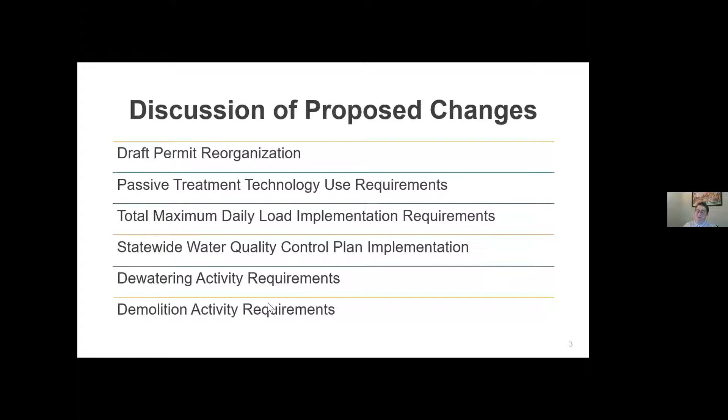So some of these changes are listed here, and they are the primary topics that I'll be covering in this workshop. We've reorganized the draft permit, hopefully for easier use. We've added passive treatment technology requirements. We've incorporated total maximum daily load implementation. We have updated some information to be in compliance with the statewide water quality control plans. We've added requirements for dewatering and demolition. And then notice of non-applicability criteria, notice of termination process, sufficiently sensitive test methods, monitoring and reporting revisions. We've also removed the bioassessment monitoring program and the rain event action plans, which I'll get into in a little bit more detail.

So for the permit reorganization, for those of you who are used to the 2009 CGP, you may have noticed a difference in the draft if you've looked at it, that the organization of the permit requirements is different. Throughout the implementation cycle of the current permit, we've heard feedback that it's difficult to navigate in the permit. So we've done some reorganization in an attempt to address this. In the order, we started off with the findings, defining which projects need coverage, applying, revising, terminating permit coverage, and then the requirements that apply to all dischargers.

Attachment A is for the linear underground and overhead projects. It had a lot of the same content that the order had, so we consolidated it. We also organized attachments A, C, D, and E, which are the risk requirement attachments, so that it flows through minimum BMPs, monitoring, and then reporting. Compared to the 2009 permit, there are 4 new attachments, including passive treatment requirements, total maximum daily load implementation, ocean plan exceptions, and dewatering.

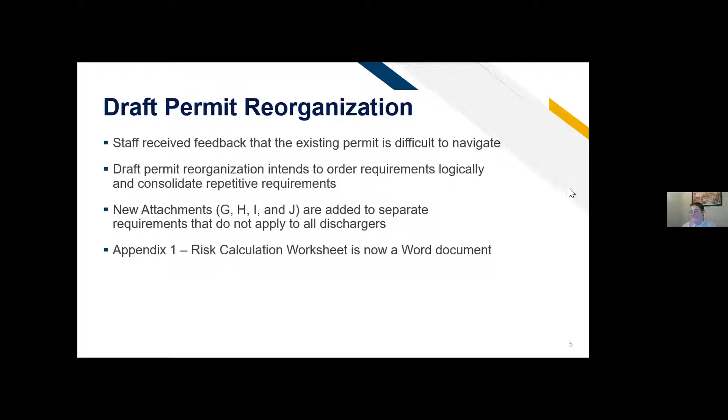So that being said, I'd like to talk about the passive treatment technology use requirements. It's kind of a big change in the draft permit, and kind of important.

Treatment chemicals which cause the coagulation and flocculation of suspended solids are often used to meet the turbidity numeric action levels in the stormwater permits. We've seen this over the years—you're looking to meet that 250 NTU, and so frequently folks will use some kind of chemical treatment.

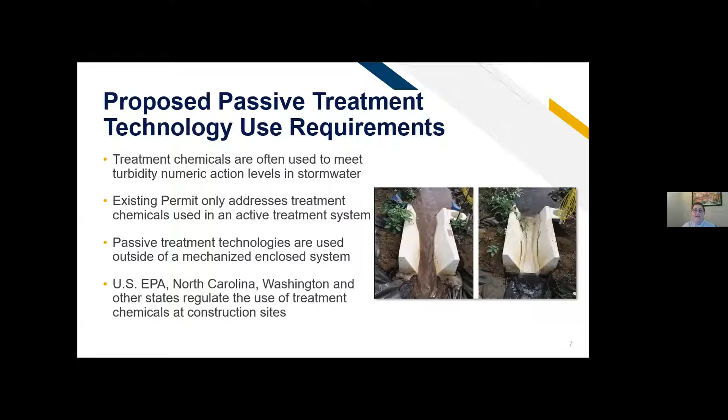The 2009 CGP only addresses treatment chemicals used within an active treatment system, which is an enclosed system that can be monitored for toxicity prior to discharging the effluent. Passive treatment technologies differ from active treatment as they are applied outside of an enclosed, mechanized system with pumps, filters, and real-time controls. Regulatory requirements for passive treatment technologies are currently implemented in the US EPA, North Carolina, and Washington's construction stormwater permits, and so we looked at those to see how we might address these issues.

The passive treatment technology requirements found in Attachment G of the draft permit specifically apply to products or chemicals that are applied to water, such as sedimentation basins or within a concentrated runoff stream. Stakeholders worked with State Water Board staff to develop the proposed requirements, and the intent is to prevent construction stormwater discharges from creating potentially toxic conditions in waterways by specifying which chemicals can and can't be used, design and application methods, monitoring, and reporting.

We had a preliminary staff draft of the permit that went out a while ago, prior to this public comment period. That draft sought to impose requirements for passive treatment chemicals mixed into bonded fiber matrices, hydromulches, and spray tackifiers. But based on feedback from interested parties, staff determined it would be appropriate to remove those requirements from Attachment G—that's a change we've made from that first draft.

Passive treatment chemicals can vary in active ingredients, dose amounts, application methods, and aquatic toxicities. They can take the form of liquids, powders, socks, and blocks, among many other applications. Dischargers should be familiar with the chemicals' characteristics by reviewing safety data sheets, toxicity information, and manufacturer's instructions.

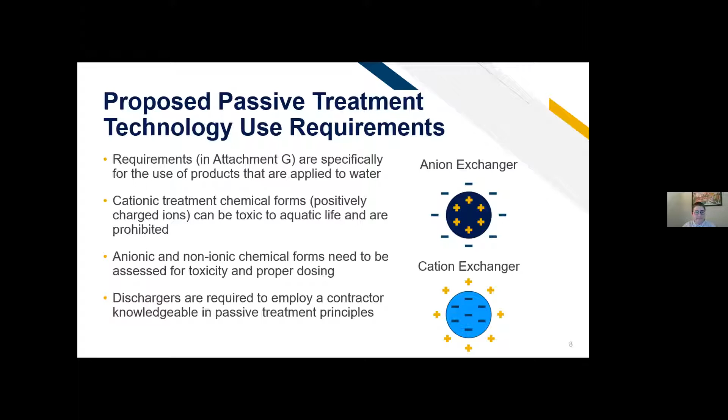So now the next big topic here is total maximum daily loads. We'll talk a little bit about this, and in the question and answer, I'm sure we'll talk about it a lot more.

So, sorry, let me find my slide here.

The total maximum daily loads are existing documents that have been adopted into regional water board basin plans by each regional water board. And they're plans to address Clean Water Act 303(d) listed impaired water bodies. TMDLs are adopted by the regional board or the US EPA, depending. A total maximum daily load is the sum of allowable loads of a single pollutant from all contributing point sources, non-point sources, background sources, and a margin of safety.

So total maximum daily loads are not self-implementing, and they must be implemented through requirements in permits or other board actions. The existing 2009 permit already includes a list of potentially applicable TMDLs, but it's outdated and does not have implementation requirements at all. The proposed draft CGP intends to update the list with existing TMDLs applicable to construction stormwater discharges.

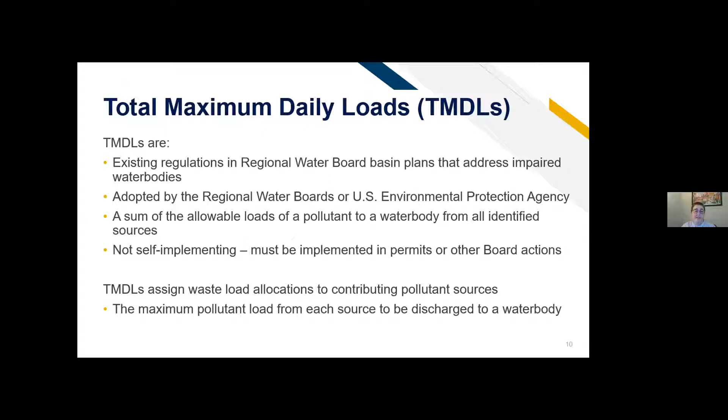So there are 69 total maximum daily loads proposed for implementation in this permit, which represent a variety of pollutant categories, including indicator bacteria, chloride and salts, diazinon, nutrients such as nitrogen and phosphorus, sediment, temperature, metals, and other pollutants that are toxic to aquatic life. Many of these pollutants are associated with sediment, which is commonly discharged, as you know, by construction projects as a result of land disturbing activities.

So responsible dischargers in this context are dischargers with coverage under the construction general permit who discharge stormwater associated with construction activities and authorized non-stormwater discharges either directly or through a municipal separate storm sewer system to impaired water bodies or watersheds identified in a TMDL with a waste load allocation assigned to construction stormwater sources and have identified one or more TMDL specific pollutants in the site's construction stormwater discharge.

That is the world's largest sentence, and it may not make total sense, but that's why we have a Q&A. And I'll continue to further explain this a little bit more. It's definitely the most complicated piece of this permit.

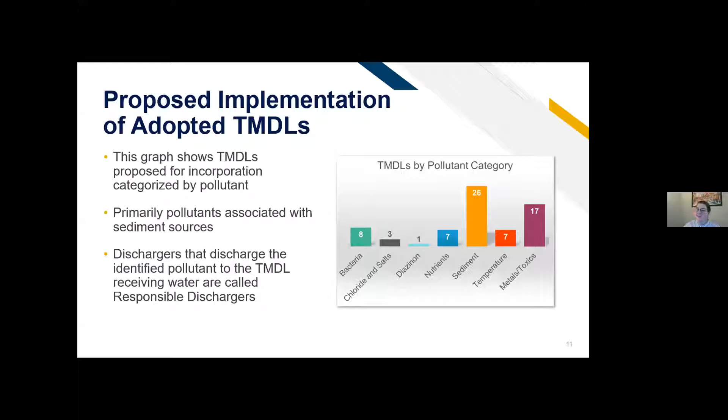So due to the variety of pollutants and waste load allocations assigned to address them, staff developed multiple implementation strategies consistent with the assumptions and requirements of the TMDL. The intent was to streamline compliance by leveraging and modifying existing permit requirements wherever we could, and existing requirements such as pollutant source assessments, source control best management practices, soil loss modeling, such as RUSLE2, non-visible pollutant monitoring, and reporting are the basis for the TMDL implementation requirements in this permit.

So we are proposing 4 categories of TMDL implementation requirements. The first being compliance with the general permit, where those are already sufficient to comply with the TMDL. All 4 of the categories must technically comply with general permit requirements, but that's all they have to do. The second category here is compliance with erosion and sediment controls paired with RUSLE2 soil loss modeling to demonstrate compliance with mass-based waste load allocations, which are typically assigned for sediment and pollutants associated with sediment.

The third one is compliance with the TMDL related numeric action levels, which are new action levels to comply with concentration-based waste load allocations assigned in the receiving water. And those action levels will act just like the turbidity and pH action levels, where if you exceed, you have to do some kind of iterative corrective action and make sure that your BMPs are working, et cetera. And then the fourth is compliance with the TMDL related numeric effluent limitation to comply with concentration-based waste load allocations assigned at the point of discharge.

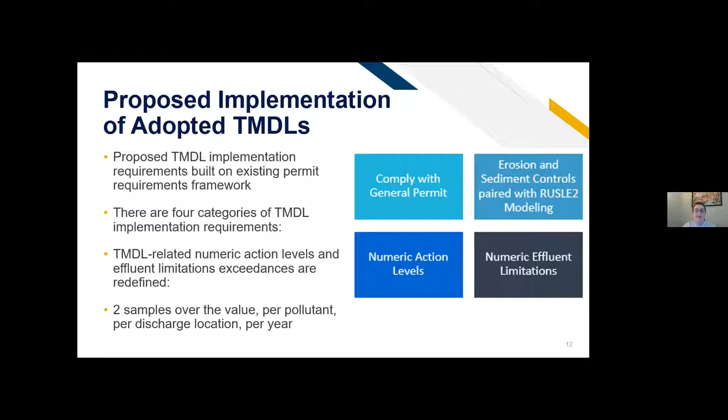One of the biggest changes from the May 2021 draft, which is the draft we're operating under now, is that staff has redefined what it means to exceed a TMDL related numeric action level or effluent limitation. Instead of a single sample limit, we define an exceedance as being 2 or more analytical results per pollutant per discharge location over the value that is listed in table H2 for the specific pollutant water body combination in a reporting year. This was based off similar implementation requirements in the industrial stormwater general permit, which went into effect in 2020. So it's kind of a new way to do things, and one that we felt would be appropriate.

So the 68 TMDLs assign a total of 204 waste load allocations. These are all just numbers that will be important, but not so important. But 14% of these TMDLs are proposed to be addressed by complying with the general permit requirements, 8 of which intend to address bacteria by emphasizing minimum BMPs. The one unique implementation requirement is for the Los Peñasquitos Lagoon sediment TMDL, which does require that dischargers submit an estimate of discharges representative flow rate on an annual basis. So for that one specifically, the TMDL itself had requirements to measure flow.

45% of the TMDLs are proposed to be addressed using erosion and sediment control paired with RUSLE2 modeling, and 41% of the TMDLs are proposed to be addressed with numeric action levels and numeric effluent limitations, 23% numeric action levels and 18% numeric effluent limits.

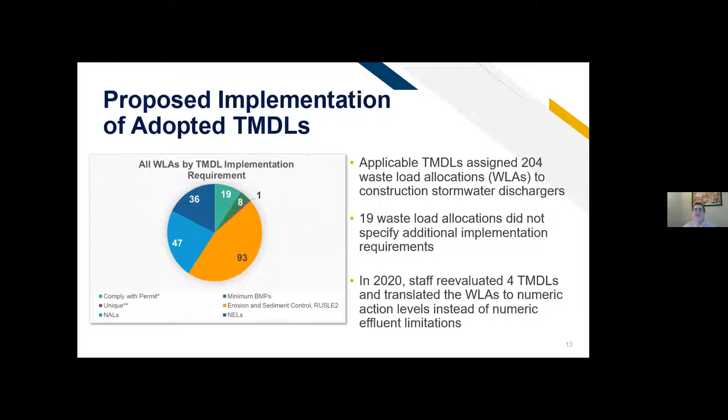Step 2 is to perform a site-specific pollutant source assessment. Does the site have sources of the TMDL listed? Of those pollutants, is there potential for those pollutants to be present in stormwater? If not, then the TMDL implementation requirements are not applicable. And then step 3 is to refer to the proposed attachment H for applicable TMDL implementation requirements to determine what requirements are applicable to that site.

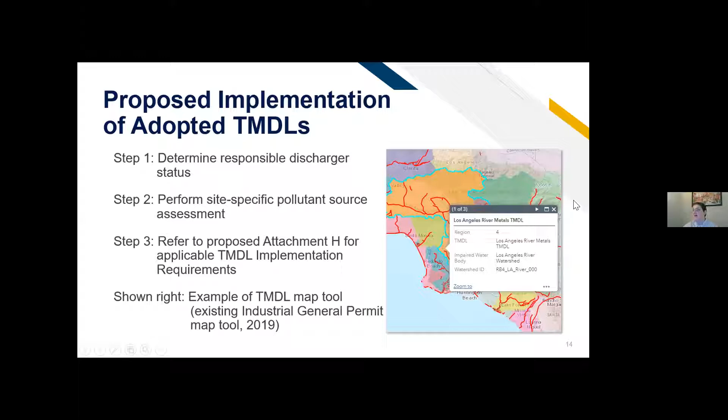And I'm sure we'll have lots of comments and questions on TMDL, but this is the presentation. You can look at this for reference as well. And then briefly, before we get into Q&A, I wanted to talk about some other proposed permit changes.

Since the 2009 CGP has been in effect, we have adopted statewide water quality control plans for ocean waters, as well as inland surface waters, enclosed bays, and estuaries. These water quality control plans function similarly to those adopted by the regional boards, but apply to the whole state. Likewise, the regulations, policies, and water quality standards established by the water quality control plans are implemented through other state water board orders, such as the CGP, the IGP, and other permits and orders.

Additionally, the ocean plan was updated in 2019 and requires the implementation of monitoring requirements for discharges directly to ocean waters. The monitoring requirements of the construction general permit are deemed compliant with the model monitoring provisions in the ocean plan. So there's information about that in the permit. Additionally, the ocean plan prohibits the discharge of stormwater associated with construction activities to areas of special biological significance, or ASBS, unless the discharger is granted an exception. The requirements for discharges that are granted an exception are in attachment I of the draft CGP.

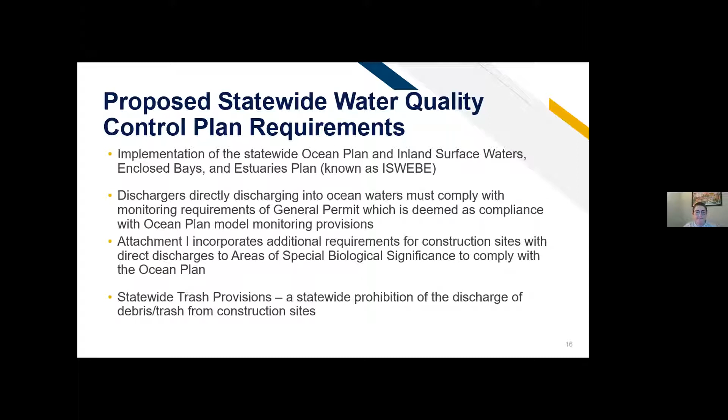All right, so dewatering. The proposed permit defines and incorporates implementation requirements for construction dewatering activities to build upon the US EPA's 2017, and now they're going to have a 2022, construction general permit. However, dischargers subject to a separate NPDES, de minimis, or low threat discharge permit for their dewatering activities are required to obtain coverage and comply with the requirements of that separate permit rather than the CGP. So the requirements in attachment J of this draft permit are for projects with dewatering activities that are not already regulated. And I wanted to make that clear because I think there were a lot of questions about that.

Dewatering discharges authorized by the proposed draft permit include mechanical pumping or siphoning of non-potable water from excavations, trenches, foundations, vaults, groundwater removal, specifically related to the construction activities, and or water collected in surface impoundments, ponds, puddles, low points, and other similar accumulation points. The discharger would be required to comply with specific dewatering discharge prohibitions, and the regional water boards may request monitoring and other BMPs associated with it.

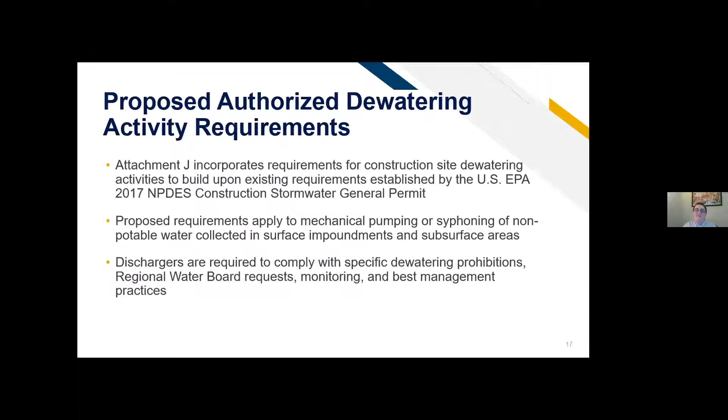The preliminary staff draft, so the one prior to this that we released for feedback, had language that restricted what methods could be used to dewater without a justification. And so we sought to address this by focusing the requirements on protecting water quality rather than a prescriptive design of the dewatering.

So demolition. The proposed permit incorporates additional implementation requirements for demolition activities to reduce the runoff of legacy pollutants such as asbestos, lead paint, and PCBs or polychlorinated biphenyls. The basis of these requirements was the US EPA 2017 CGP. And something to note is that this applies to projects that require coverage under this general permit, so those that disturb 1 or more acre of land or are part of a common plan of development. If the demolition is occurring on a slab and the remainder of the project doesn't disturb soil, then that project would not necessarily need to comply with these requirements.

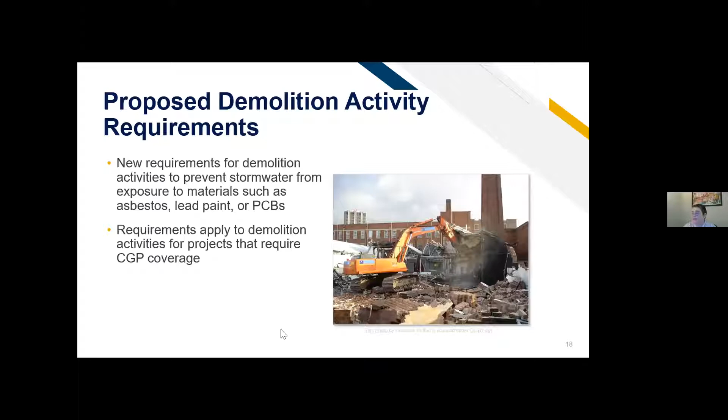And then I wanted to talk about the notice of termination a little bit. We found that notices of termination were being submitted to the regional board, and it was taking a very long time in some cases to get approval or to get someone to look at it. And so some of the changes that we've made is that we ask in the permit for the discharger to submit project-specific information, final site map, visual inspection, photo documentation, etc., so that it'll be easier from a desktop level or a short inspection for the regional boards to approve the notice of termination.

And then we've added in the automatic 30-day approval of NOTs by the water boards if they've not addressed it in any way. If they haven't gone in and said, you know, I've marked this for review, I'm going to do an inspection, or taken some other action.

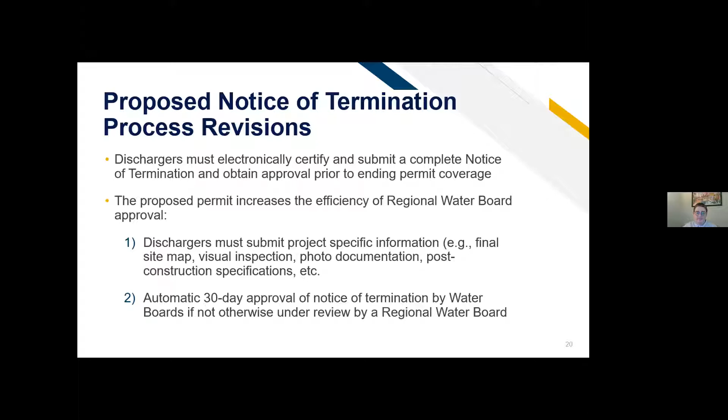And then a bit of a small one here, but it does matter. We are implementing the new federally sufficiently sensitive methods test method rule. And the US EPA has finalized minor amendments to the Clean Water Act. Excuse me. And this general permit requires the use of sufficiently sensitive methods to meet the requirements of the amended Clean Water Act, and requires dischargers to ensure all laboratory analysis are sufficiently sensitive and conducted according to test procedures under 40 Code of Federal Regulations, Part 136.

That said, these requirements apply to samples that the discharger collects and sends to a laboratory for analysis, so not field measurements. For the most part, construction stormwater dischargers perform field sampling for pH and turbidity, where properly calibrated instruments used in field sampling will comply with the sufficiently sensitive test method rule. An example where this rule may impact dischargers is through non-visible pollutant monitoring, especially when coupled with applicable TMDL implementation requirements.

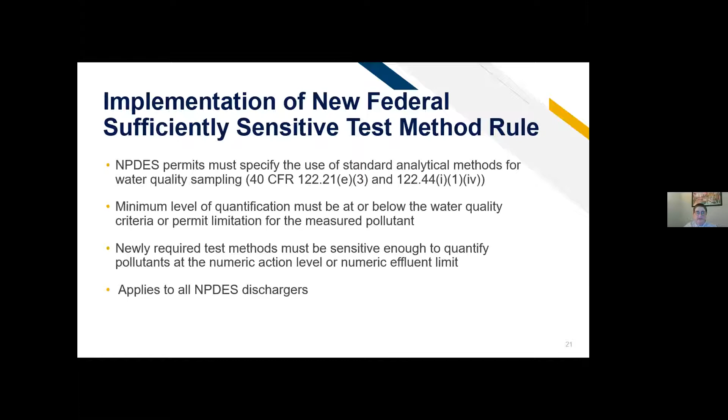My notes are a little weird here.

And we'll use the fees that are already paid into the SWAMP program to do a bioassessment monitoring study. And it would be to determine if there are significant water quality, biological integrity, and watershed health impacts from large, high-risk construction projects. So that study is no longer on the dischargers. It's something we're going to do at the state board.

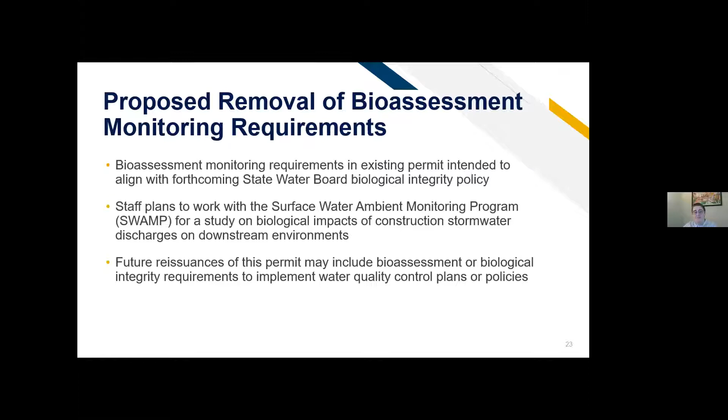The state board in the future could potentially decide to include bioassessment or biological integrity requirements to implement specific water quality control plans or policies through future permit reissuances. So this may not be the end of it. We may see it, but not this time. So we are not proposing additional receiving water monitoring requirements to replace bioassessment monitoring. And the receiving water monitoring requirements for risk level 3 and LUP type 3 sites should largely be the same, save for some clarifying revisions in the draft.

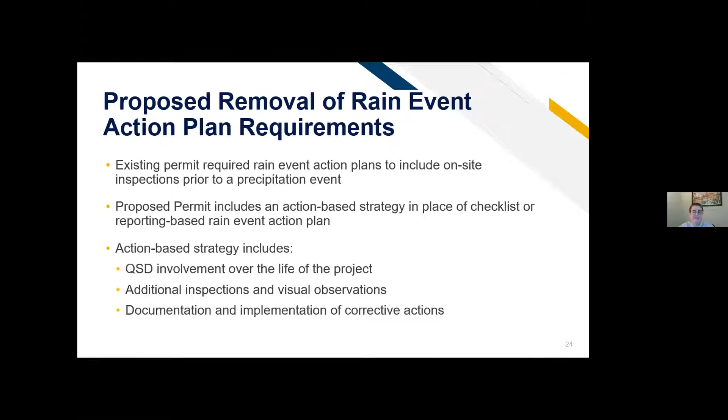And then for the REAP, the existing permit included the rain event action plan requirements to provide dischargers a consistent on-site inspection checklist for site preparation prior to a precipitation event. And staff determined that the goal of the REAP should be action-based instead of a checklist or reporting-based. So the proposed permit replaces REAPs with QSD involvement over the life of the project, QSP pre-storm inspections and visual observations, as well as implementation of site-specific corrective actions.

So anticipated next steps: we had a hearing on August 4th. Public comment was due August 13th, and we're here in this fall 2021 area where we're working on the formal response to comments and a final draft of the permit. And then consideration of adoption by the State Water Board is to be determined at this time. We would like it to be soon, but we also want to make sure that we consider, respond to, and really put into practice a lot of the public comments that we've received so far.